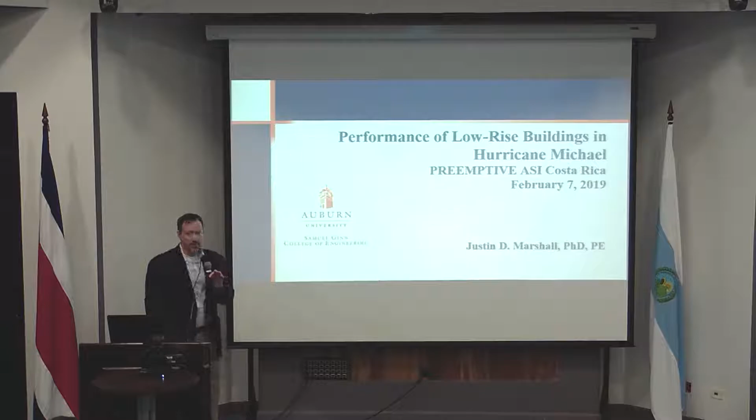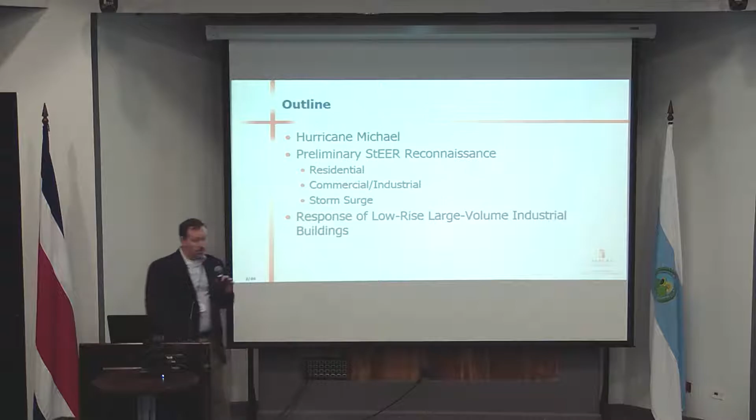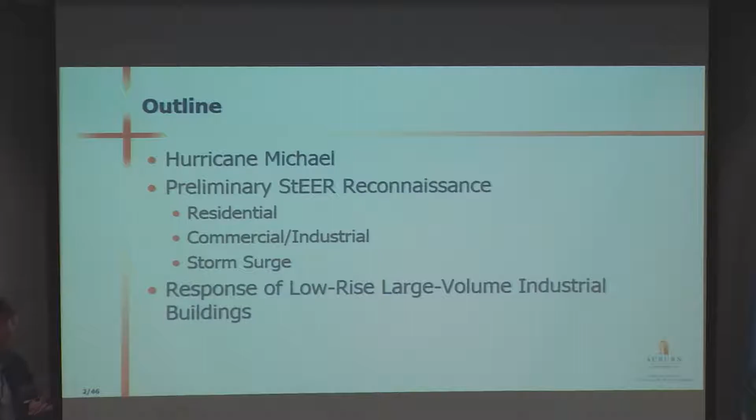My talk today is going to focus a bit on something I've been doing recently, something a little new and different for me. I'll talk about Hurricane Michael itself, what happened, and then about a couple of trips I took back to the region and some of the performance issues we saw specifically related to low-rise buildings. Then I'll talk in more detail about a follow-on study related to a National Science Foundation RAPID project, where we looked at a specific class of buildings based on a number of structural failures we saw during the initial reconnaissance efforts.

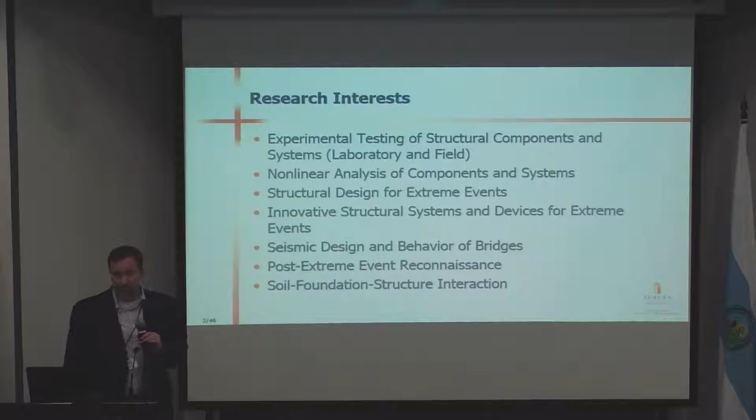As background for what I do in general, I like to be in the lab, but that costs a lot of money, so I don't get to do it as much as I want. Breaking big things is one of the fun parts of my job. I also do a lot related to nonlinear analysis of components and systems, and most of my career has been related to earthquake research—passive energy dissipation, ductility, different types of fuses in structural systems. Having been a practicing engineer for several years, structural design is also important to me. I've been part of developing innovative structural systems and devices for extreme events, primarily seismic related, but also considering other potential hazards. I've done a lot of work related to bridges, and I've been involved in several post-event reconnaissance missions, Hurricane Michael being the most recent. I've also worked with some of my geotechnical colleagues on soil structure interaction, which I find quite intriguing.

All right, let's talk about Hurricane Michael itself. It made landfall as a Category 4 hurricane, which is pretty significant, on October 10th, 2018, about 4 or 5 months ago. The eye wall track hit just south of Panama City, Florida, with maximum sustained winds in excess of 150 miles per hour. It was the fourth largest storm to make landfall in the United States in recorded history, and the largest to make landfall in the panhandle of Florida.

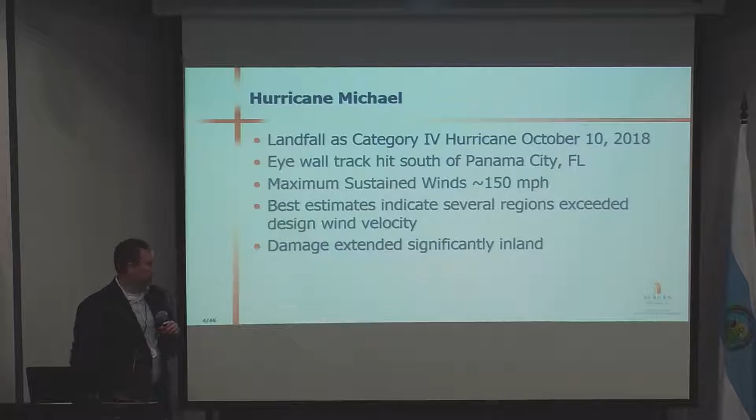Our best estimates indicate that within several regions, even far from the coast, the wind speed exceeded the design code, and the damage extended significantly inland, not just at the coast. We were doing damage assessments well into the interior, even north of Interstate 10. Another big factor I don't talk about as much—the storm surge in the area of Tyndall Air Force Base and east towards Mexico Beach was 8 to 12 feet, and I've heard more recent studies, not yet published, of 13 to 14 feet in certain areas. So we're talking about a pretty significant wall of water.

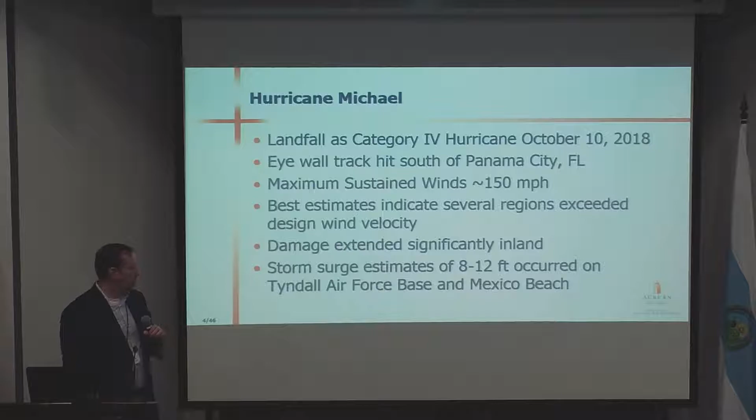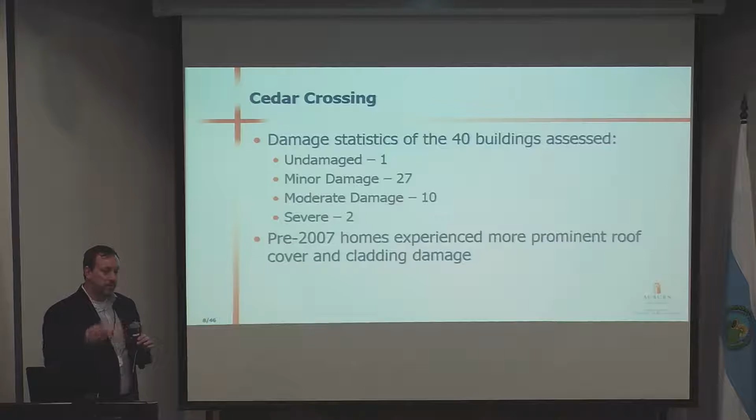But the other aspect is that the code had changed as we went through time - ASCE 98 and then 2002. The code-based wind values changed as well.

So if you look at the damage, there's nearly complete shingle loss in a lot of cases. You see a lot of garage doors that get blown in or sucked out depending on which direction the wind goes, and a lot of fences are down as well as other damage.

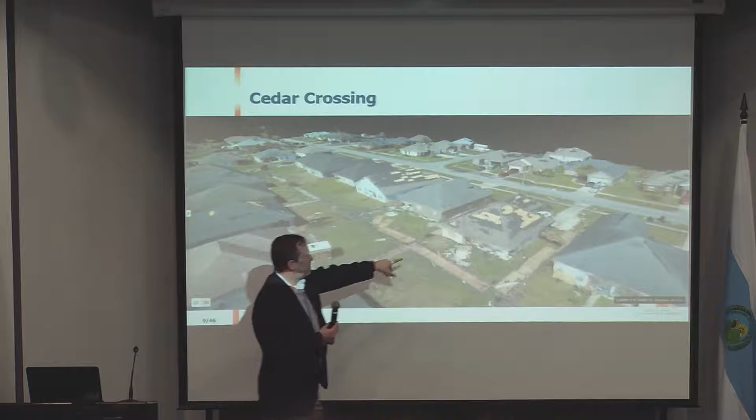You can still see in a lot of cases the owners haven't even come back to remove the plywood that, by law, they have to have in this area to cover windows to prevent damage from flying debris.

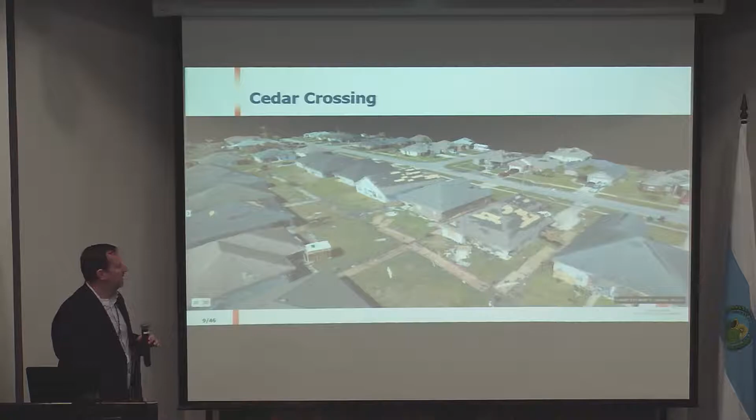This is another neighborhood, and I included it because it was in Mexico Beach, and it happened to be within about 200 meters of one of the towers that the University of Florida put up to measure wind speed.

This neighborhood was much younger - all the houses had been built within about the past 5 years. You'll note here, and we'll have all the numbers, but there are a number of houses now that are undamaged, and almost all the rest have minor damage. That's because of the more current code version as well as the construction methodology used then.

A total of 15 structures were assessed in this smaller neighborhood. We had 3 that were undamaged and 12 that had minor damage - a much better overall performance of these buildings, largely because of the construction age.

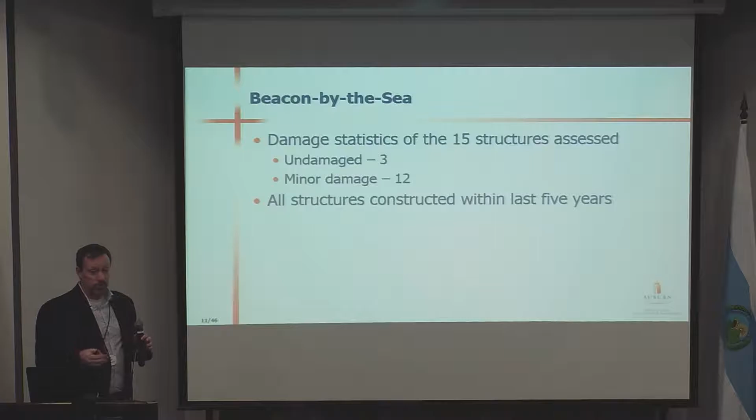Even if you're keeping up with normal codes, once a building is built beyond a certain limitation, something needs to be done - earthquake, hurricane, whatever the case may be. As structures age, their properties generally degrade, and it's something we have to consider.

Here are some representative photos of what kind of damage you would see here. We've got a little trim panel on the edge here, and here you have a bit of asphalt shingle damage as well as some trim.

But the thing is, most of these houses didn't even have any water ingress problems, which is a very common problem once your building envelope is penetrated in some way. Often you'll get significant damage from water blowing inside. But in fact, this house, the person indicated to me that they were in the house during the hurricane, which they also indicated they would never do again. The way they described it was a freight train going next to their house for four hours straight. But there was no interior damage, nothing. These houses were built much more recently to the current code, and it clearly shows that the things we're doing are having an impact.

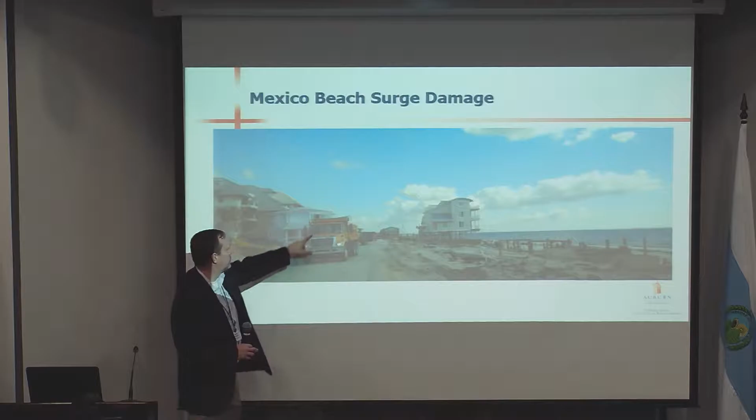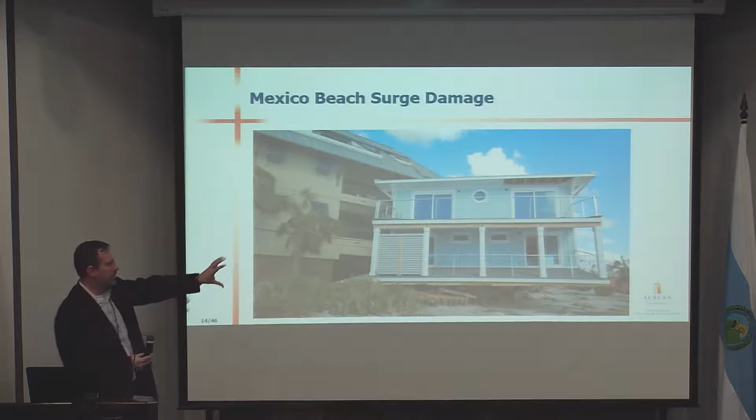I don't know if you can see this, I'll take a picture, I have a better picture of this. This house was not there originally, it was somewhere over here. That's a close-up picture of that house. You can see the house is pretty much intact, it just got picked up off its foundation and floated to the other side of the road. So they used to have beachfront property, and now they're attached to this hotel right here.

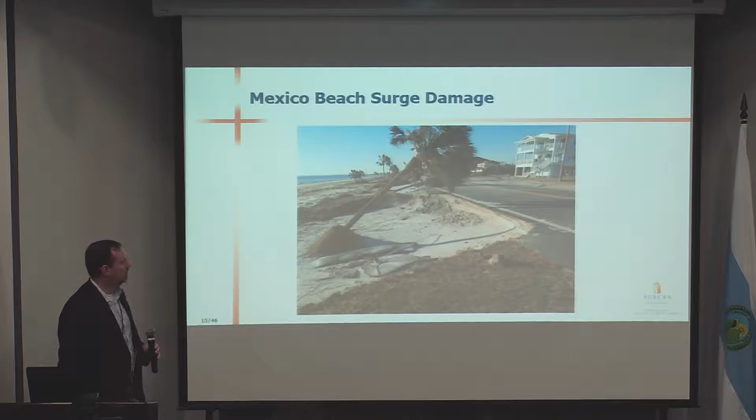In addition, in some areas the storm surge did not actually get up and over the road, but the erosion it caused from hitting the road was significant. This is a palm tree that's probably 30 or 40 feet tall, and this right here is about 5 or 6 feet of height difference between the top and the bottom of that location. You can see here, this is the center line of the road, and there are places on this road where the road doesn't even exist anymore because it wiped away entirely.

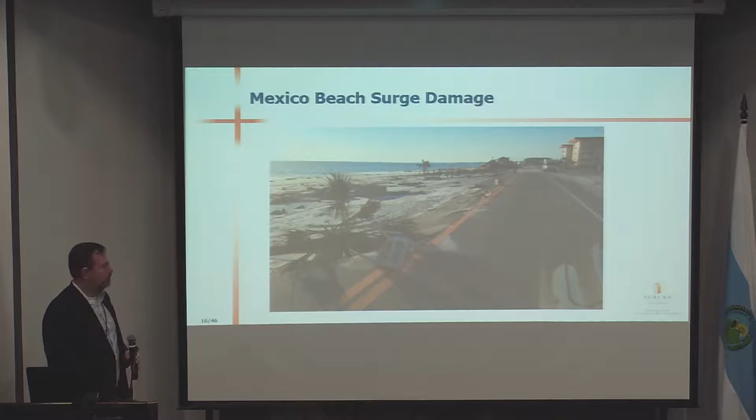And you can see here places where structures used to be that no longer exist, because they were literally pushed off their foundations and moved. So this is a video I took, and yes, I was driving while shooting this video, but it was a one-way road. You can see the debris piles and the extent of the damage that occurred in Mexico Beach due to this kind of scenario.

So this is an area where there's been a lot of work going on, but generally, as with tsunamis and storm surge, the only good way to build a structure to withstand that is to get it up above the level, or the other approach that's been discussed is having blowout walls. In other words, walls are designed for a given wind pressure, but once a certain pressure hits, they literally blow out and pop off as designed, so the flow can be unobstructed and the structure above can remain. When you start talking about the magnitude of hydrodynamic forces and flow, it gets very, very significant.

So while we were down there, we were doing a lot of driving around and taking pictures. I've done research in the past on metal buildings, low-rise metal buildings in earthquakes, based on some things I saw in New Zealand. So now that I understand them a little bit, I'm always kind of on the lookout.

I started noticing that a lot of these buildings had a very similar thing going on, that they were failing in a way you wouldn't necessarily expect. Well, you don't want them to fail.

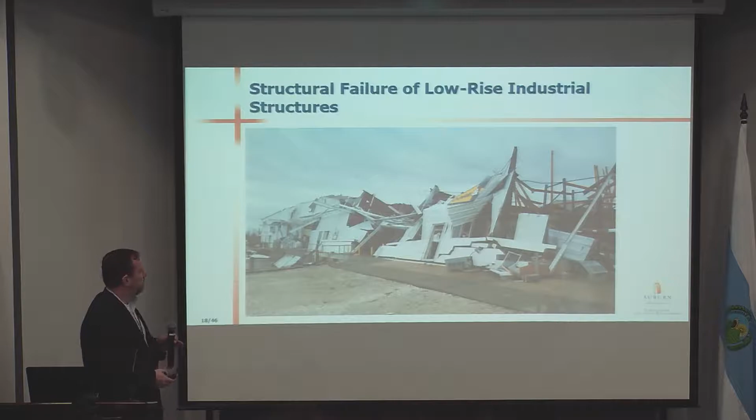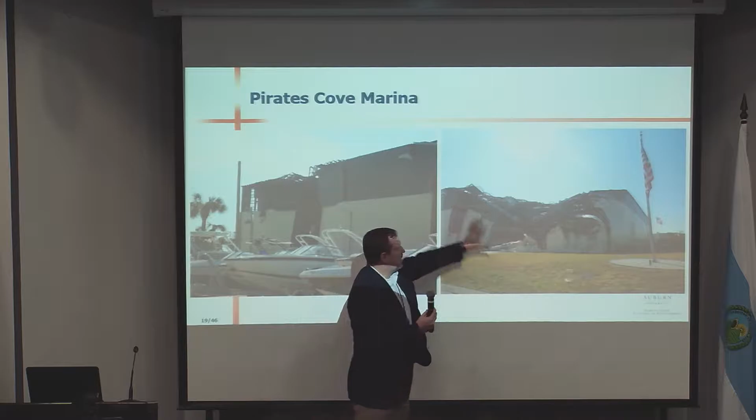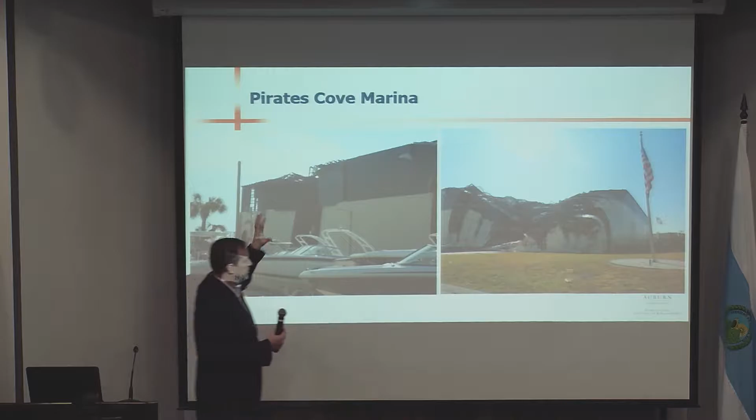But I started just taking a lot of pictures, and we would see these pretty substantial buildings. This is the end wall of the building, a boat storage facility, probably 50 feet tall and several hundred feet long and wide. So this was a pretty significant building, and just one end of the building happened to be pushed in. You'd see a failure at the roof level that would generally be arrested at some level by the remainder of the structural system, but there was a localized end wall failure.

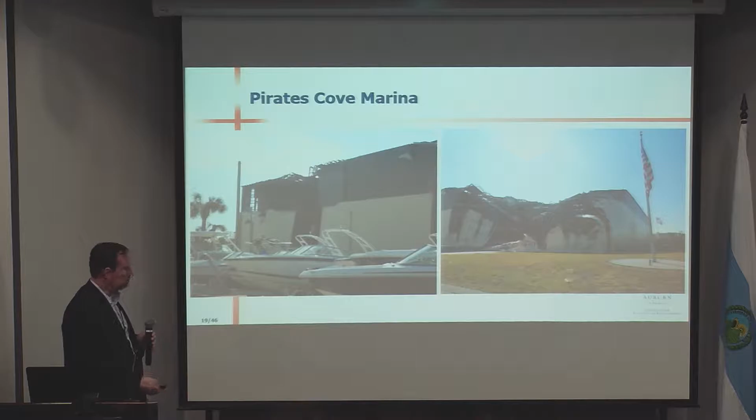We started noticing that this was a pretty common thing. This is a high school building, the auditorium end of the building. This is a little bit different, but again, we have the end wall of the structure failing. We see a lot of the brick.

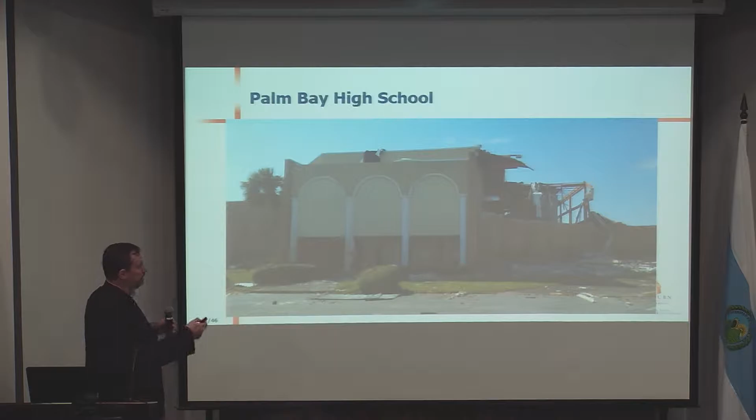This one's a little bit different, but a pretty significant structural failure, because a lot of failure in wind is cladding and components failure. We've got eaves, we've got other roofs that fall off, but for us, the things that really cause life safety issues are these actual structural failures.

This is a school building, literally just 100 meters north of the other one that we just saw. And again, you'll see that this particular end wall had a pretty significant failure. You can see the purlins up there and the shape that they're in.

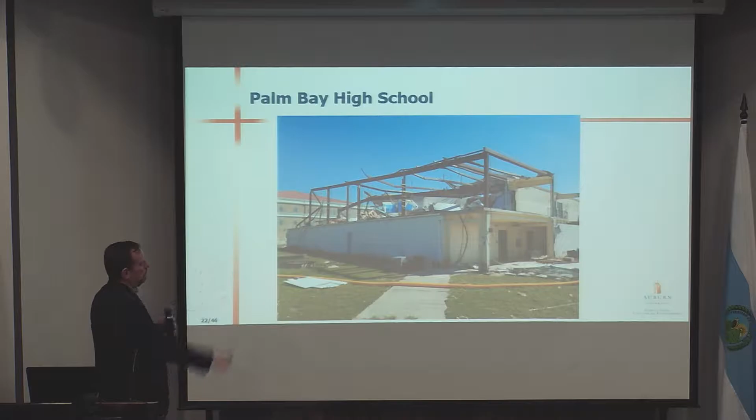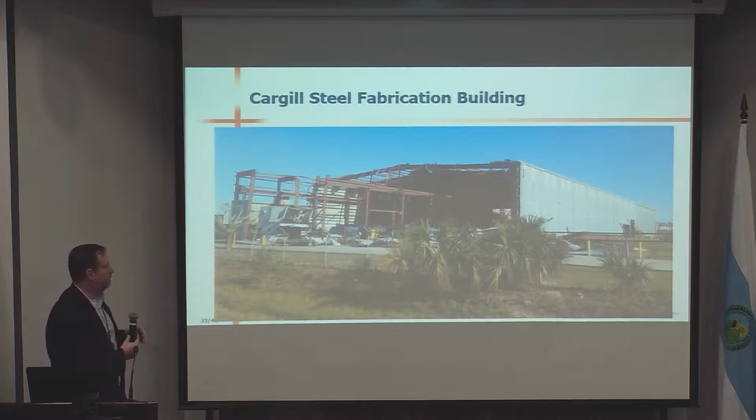This is a larger industrial metal building, a manufacturing facility that did steel fabrication. This had been cleaned up. The end wall of the building was out here, and it had blown in this way, and they had been cleaning it up so they could get their stacked material out, so they could sell it and get it moving to other properties.

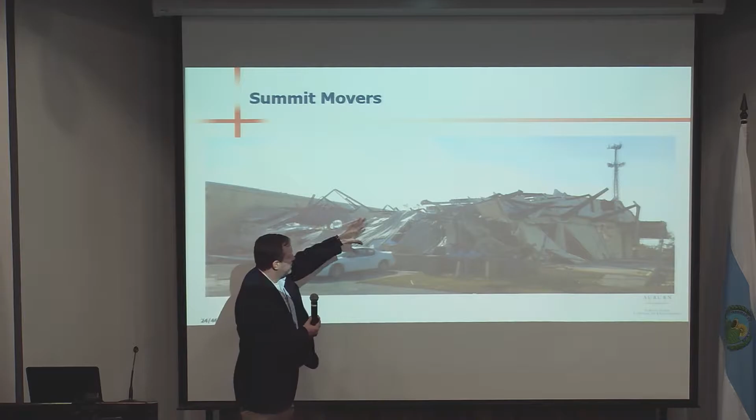Here's one that was a much more significant type of failure. Again, this wall, the building is collapsing here, and everything is moving in that direction.

Tyndall Air Force Base, I don't know how much you paid attention to it, but almost every building on Tyndall Air Force Base was damaged in one way or another, and some of them pretty significantly. This building right here was an aircraft hangar building, and Tyndall Air Force Base has the F-22s.

So when you think about things, saving a life is clearly an important thing, but these F-22 aircraft generally cost in excess of $100 million each. I don't know the actual number. So you've got a building that may cost $4 or $5 million to build, and it may cost a couple million dollars to re-roof every 10 years. But if you're storing several hundred million dollars in aircraft within a building, think about the potential issues.

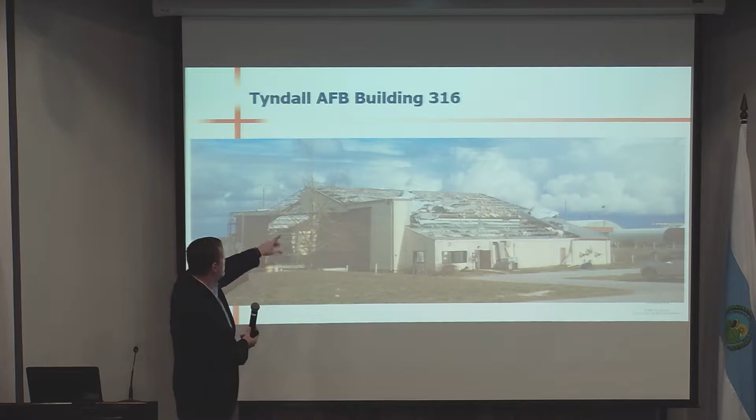So this building right here again had an end wall failure. It's kind of hard to see from this picture, but the frame over here is literally bent inward, and the whole wall is pushed back into the building.

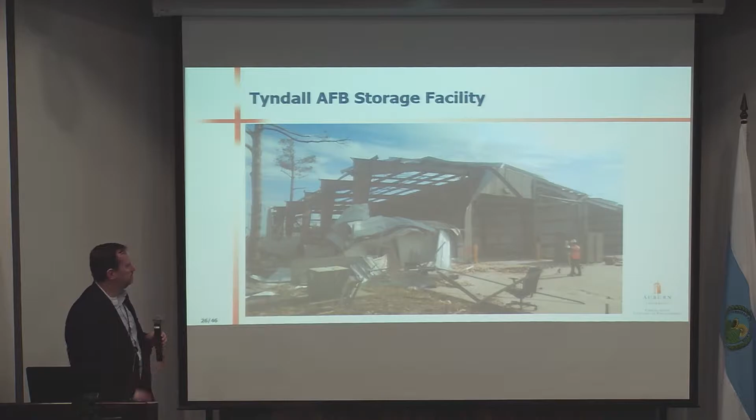This is a similar building right across the street from it. In this case, the cladding was pretty much torn off. If it wouldn't have been, there would have been a more significant failure. This roof frame beam was bent inward due to the positive wind pressure.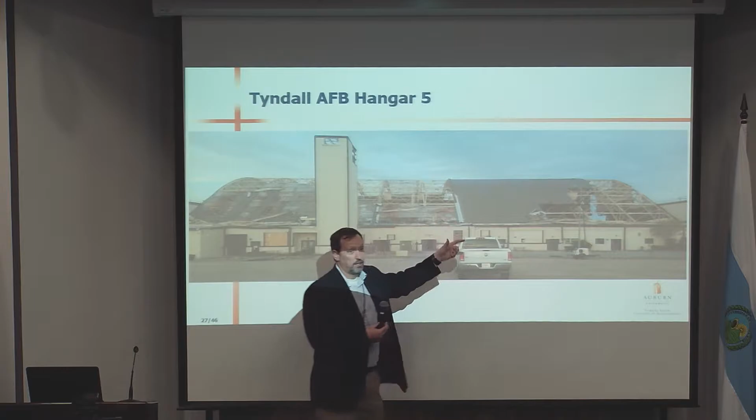What it turned out was that this is the original roof, and instead of re-roofing it correctly, they just went and installed a new roof over the top. What that means is that's great, it keeps out water, but in a design wind event, you do not have the capacity you need, because your roof is not directly connected to your structural components below it. It's connected to something else that's connected to the structural components.

So this is a case of a significant building that would have cost a decent amount to retrofit, but there were multiple aircraft in there. Clearly they haven't indicated whether or not they were damaged, but we know there were at least 22 F-22s here on this post during the hurricane.

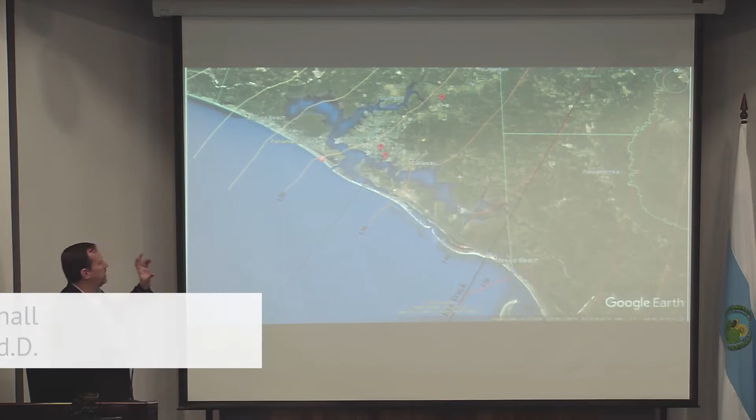We went back after a couple of weeks. We worked with the National Science Foundation because we identified this particular issue that we thought was pretty important related to these industrial buildings. So we went back to do a more detailed review, other than just take pictures and drive through. We found three buildings that we were looking at that I'll show you next.

We've got a little bit more detail on buildings that were damaged in a way we feel is unacceptable. So here's my 120 mile per hour wind speed estimate, here's 130. All three of these buildings have roughly the same wind velocity that they experienced. So we're looking at these three buildings now in a little bit more detail.

The first one is what we call the Watson Marina building. If we look at the map here, we had an expectation, depending on how tight we get between the contour lines, we're around 123 miles an hour. Now, if I look at the ASCE 7-10 map through the ATC website, for a risk category 2 building, that would be 134 mile per hour design. For a risk category 3 building, that would be 144 mile per hour design.

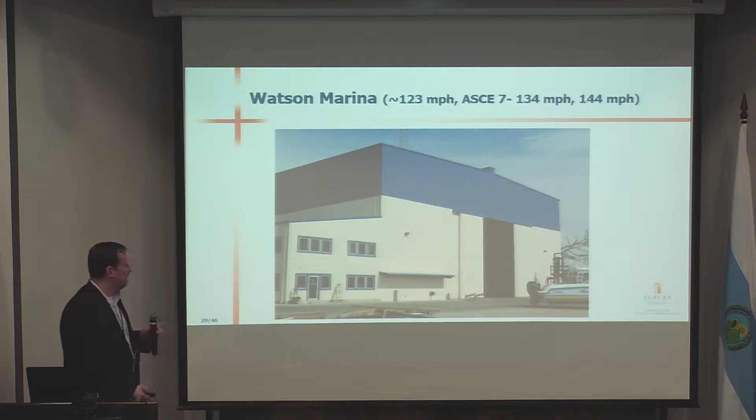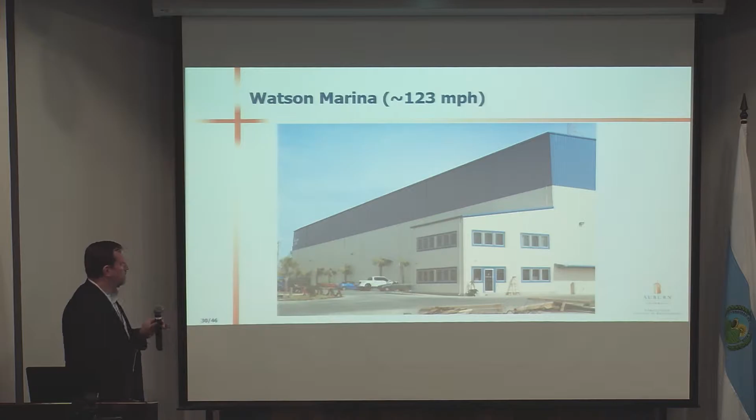Now, this just stores boats, so it is not likely a risk category 3 building. So the design wind should have been 134 miles per hour. We have the drawings to verify that they used something in that neighborhood. It's a pretty substantial building, probably 50, 60 feet tall, about 100 feet wide and a couple hundred feet long, and this is what happened to it.

When you look at the map, this is the wind direction where the positive pressure would have been the highest wind velocity on this face. So when wind hits a building, you get positive pressure on the windward face, and almost every other surface develops a negative pressure. And so this then, at some point, failed inward.

The damage - when you were at the other end of the building, you couldn't tell the building was damaged. The only damage was within these first two bays of framing.

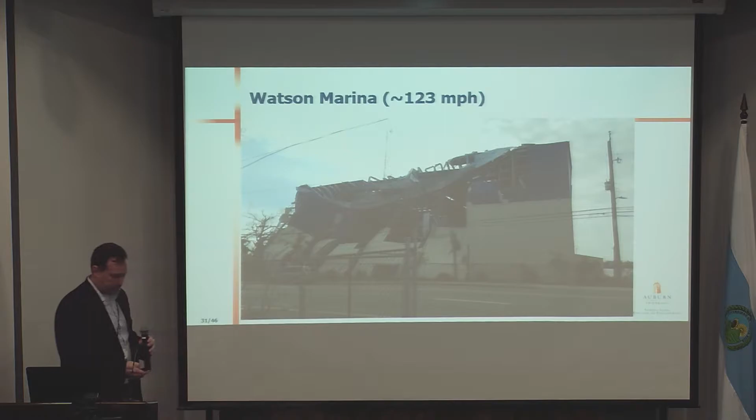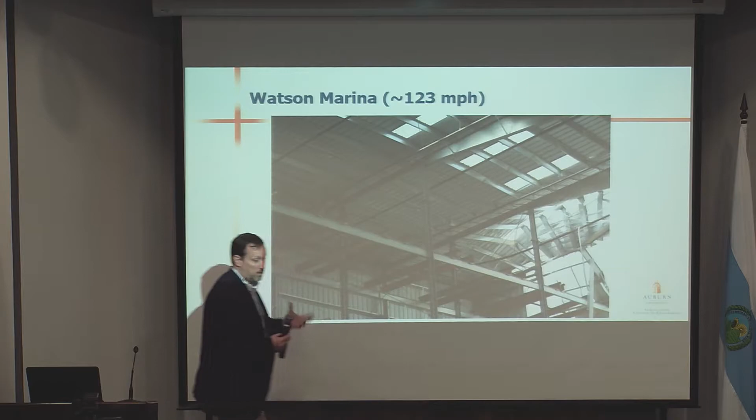If you look, what I want to highlight is what you can see on these roof purlins. You can see evidence that these ones clearly are buckled and have had some pretty dramatic failure. But even back here, a few bays in, you can see where these Z purlins, which are about 10 inches deep and are light gauge metal, are buckling due to a compressive force.

If you look closer, you can see it here. You've got it here, you've got it here. These are continuous over the rigid frames. But you've got a lot of evidence of significant compressive forces that are causing buckling.

So that's one building. This building, and this is one that is somewhat heartbreaking, is on the port facility for the Port of Panama City. They received a certificate of occupancy on October 1st, 2018. The hurricane hit on October 10th of 2018.

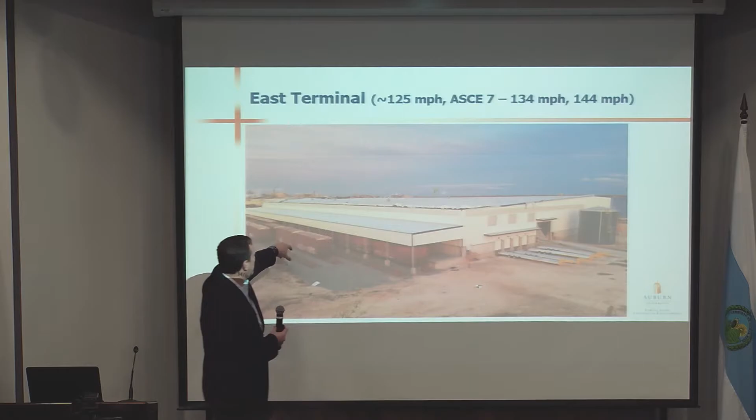Slightly different structural system - this is your typical metal building system, but it's a very large system. You can see these rigid modular frames with interior columns, but the framing here, which is open web steel joists, is non-existent anymore. We looked at this building, and we do have drawings again from this building.

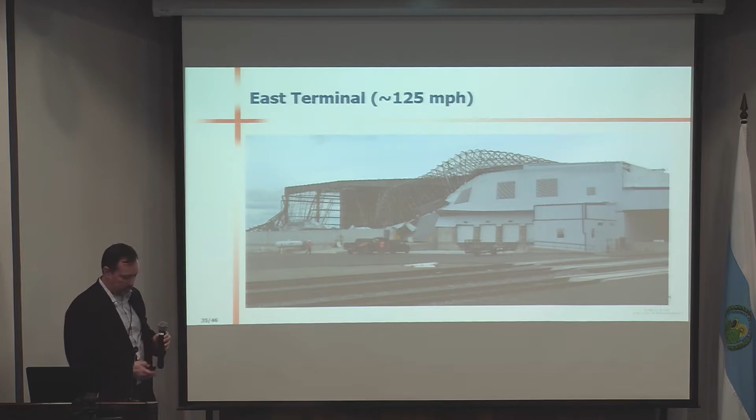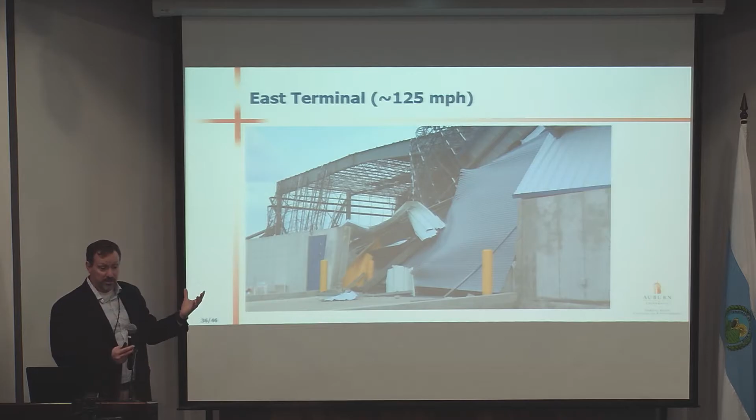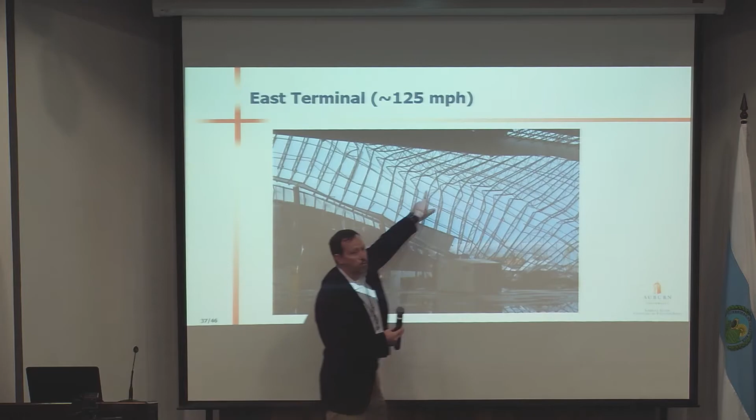If you look very closely, you can see that these open web joists are buckled in many different locations. It's hard to tell when you're doing this forensic analysis what happened first, what happened second. But when we look at the inside of the building, it's pretty clear that at some level these things were experiencing some very significant compressive forces, were buckling and causing the loss of the diaphragm action at that level.

The last of these buildings that I want to show is a third type, and this is a Port of Panama City building, so unfortunately the port got hit pretty hard. This is further inland, but this is a tilt-up wall building with interior steel columns and a typical steel roof framing system with joists and joist girders running in both directions.

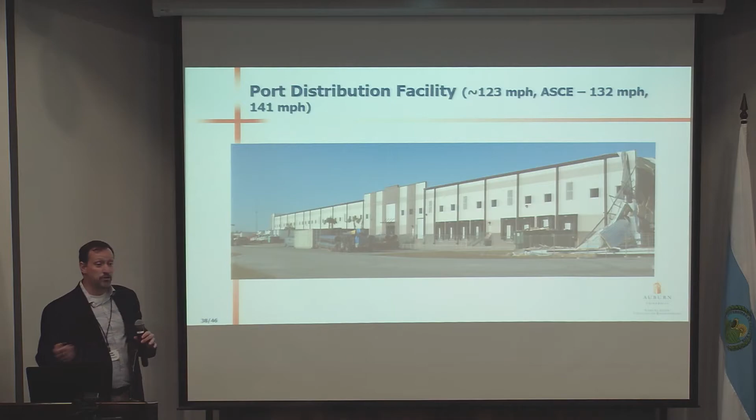This is an original part of the building. This was an add-on in 2013. So this building is not as new as the one we just saw, but still pretty new. Basically, we had a similar thing, but the difference is the precast panels at this end had all collapsed out, and a few on this side had collapsed out, and you can see the total loss of the roof system within.

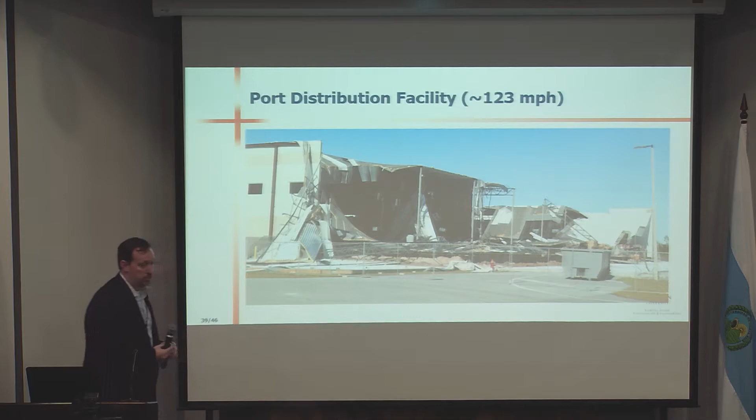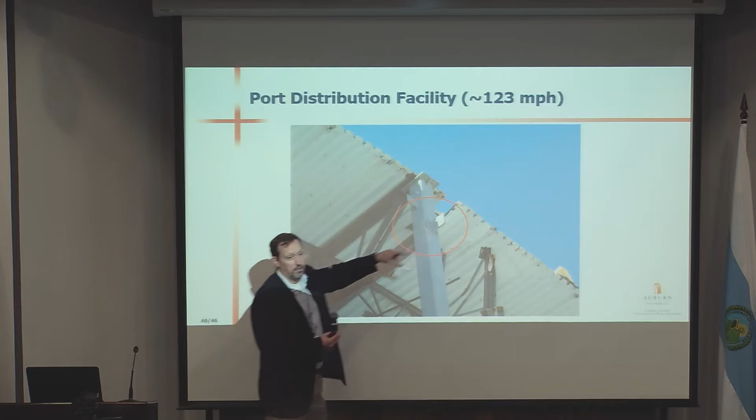So this is the first interior column, and there was a joist girder over here. You can see the indentations from the bottom flange, or the bottom chord of that joist girder, hitting this tube steel column, indicating that the compressive force coming from the wall into the lateral system was a driving factor in the failure.

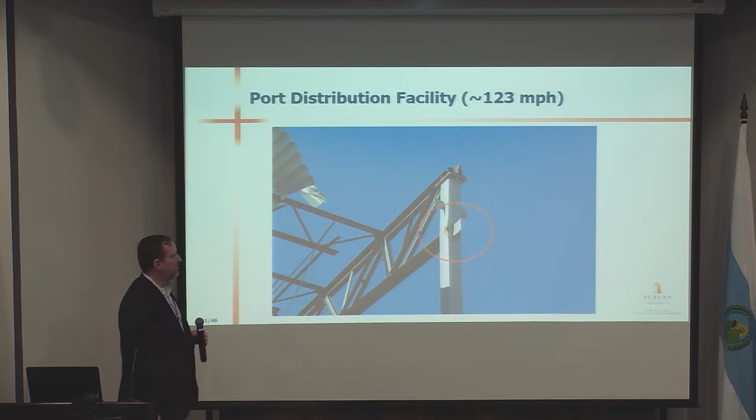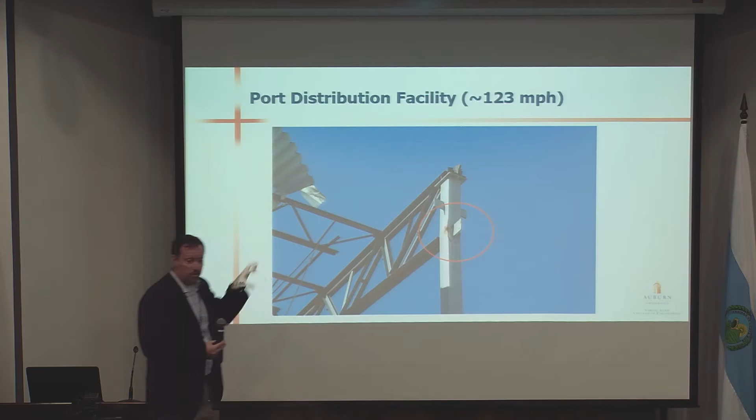Here is another one with a very similar but a little bit more extreme condition. It's nice that it has continued to rust, so we can see where the paint broke up due to the flexing of the system.

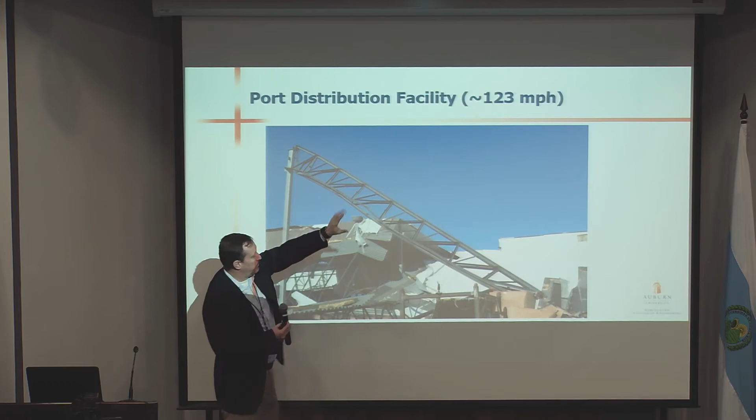And then this is one of the joists that would have come out onto the precast wall, and you can see along its length this was a welded tie together that, due to the compressive force, caused buckling along that length. You can see it even better here in plan, looking up, to see that the failure of this was not due to an excessive vertical load, but instead some sort of a buckling mechanism.

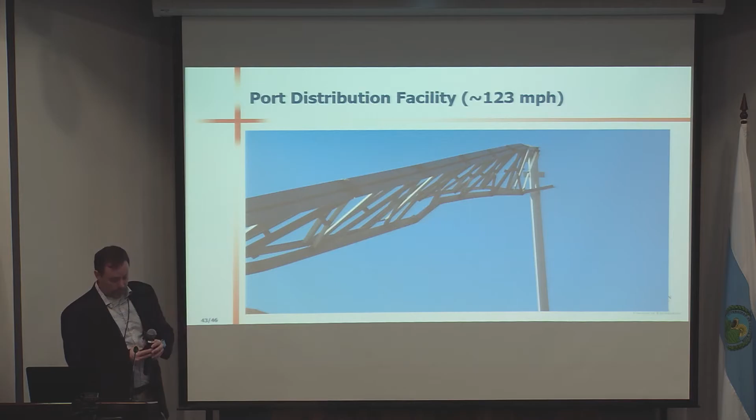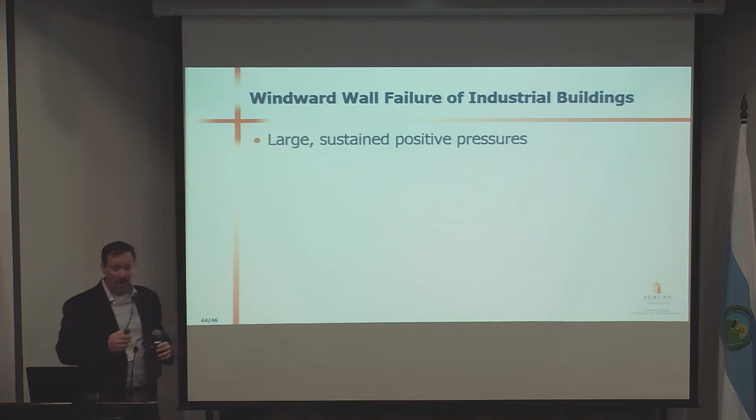So what happened? Well, we had a large sustained positive pressure, wind velocities in excess of 120 miles per hour, less than the design wind, but still very high.

It also generates an uplift on the roofing system, and often with these systems the roofs are so light that the uplift wind pressure will exceed the dead load and cause an upward movement, which is why roofs get sucked off in hurricanes and planes fly.

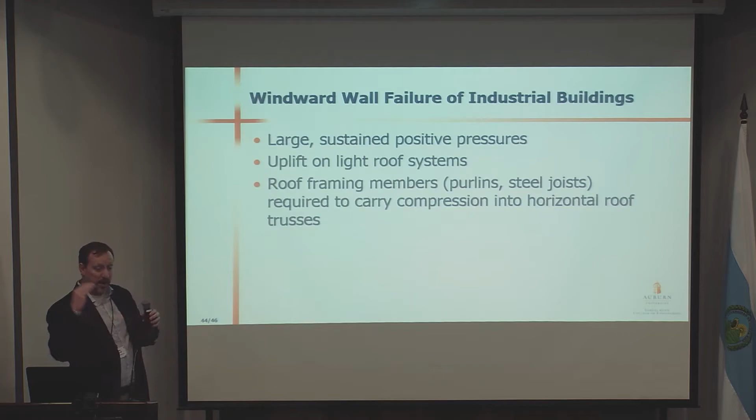And the roof framing members, whether they're purlins or steel joists, they have to take that reaction from the wall into the horizontal roof trusses. And the question is whether or not they can.

What we believe, we're working on this now, is that the failure was initiated by buckling of those roof framing members, which removed the support of that end wall, causing them to fall inward.

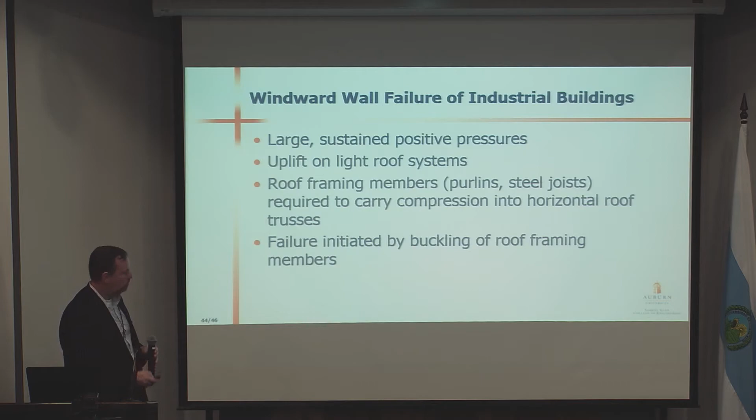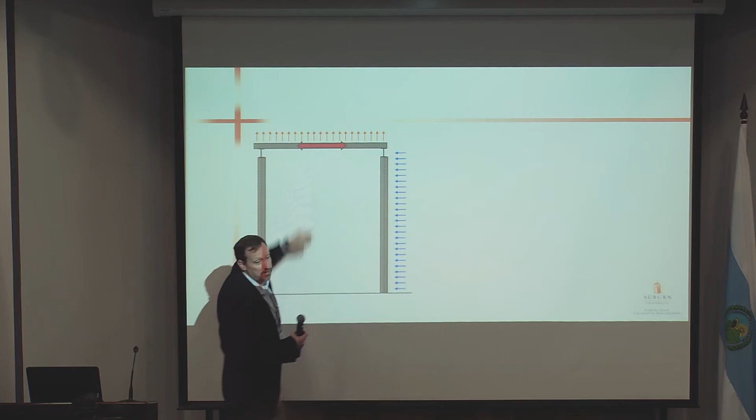So pictures are generally better for this type of thing. So if this is my wind, and I've got a windward wall here, so I've got some wall system that's taking the load, and it's going to span up to down here. And I've also got at the same time a roof uplift, so I've got an upward flexure, and I've got a force coming in here. These are going to have to take axial forces in my diaphragm.

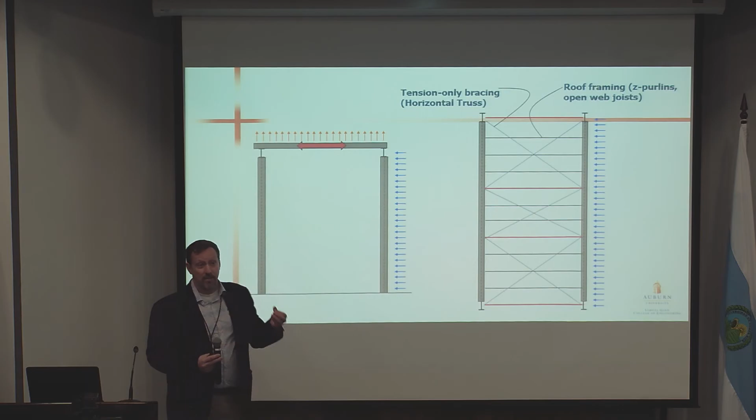And what we feel like is that these elements were subjected to compression forces that either they weren't designed for, or that the capacity was not there — we honestly don't know. So we're looking at this problem right now because we feel like this is an issue with the load path that relates to a pretty significant problem.

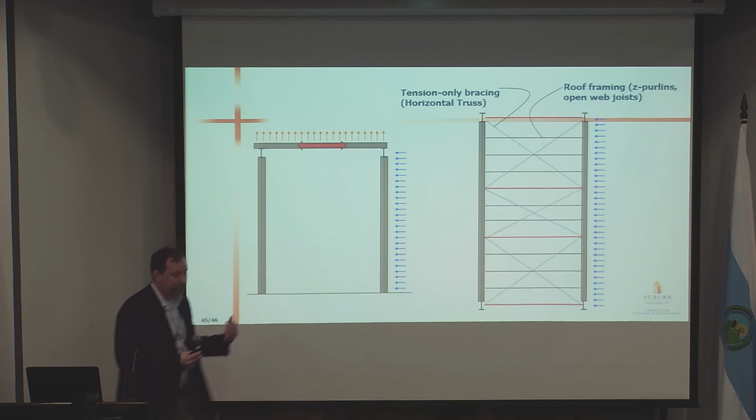There are a number of these structures that did well, but the fact that this happened on these larger structures is indicative that it's something that occurs in every structure, but the problem only gets too big when you have a very large volume. So that's our working theory for the moment.

What we're doing is we've got this detailed investigation. We have plans for all 3 of these buildings. We have taken LiDAR data, so we're going to have point clouds. We've got structure-from-motion from UAVs where we were able to fly over these, so we're going to use all this information to develop an analytical model that we can then use, and hopefully if it comes out the way we expect, at some point we can look back to determine if there's some experimental testing necessary to determine how we can solve this problem, and that would be in a future project.

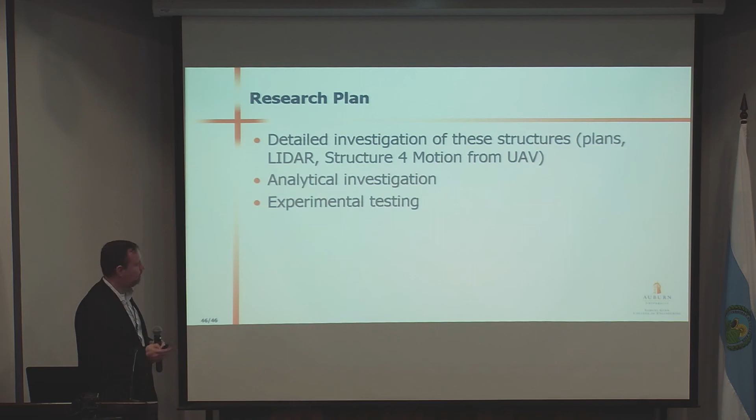So that's all I have. Something that's a little different from what I normally do.

Sorry, I kept saying earthquakes — that's just 10, 15, 20 years of earthquakes, you can't just turn it off into hurricane. But it's something that to me also has aspects related to earthquakes, because load path and understanding your load transfer in elements is of very critical importance in all that we do as structural engineers, independent of the hazard.

So I don't know if we have time for questions or if it's time to go to lunch, or what.